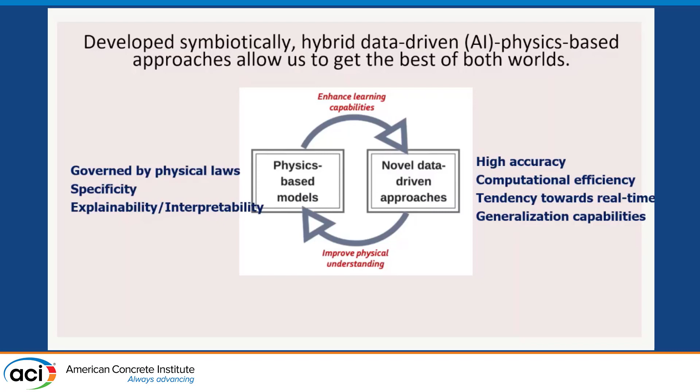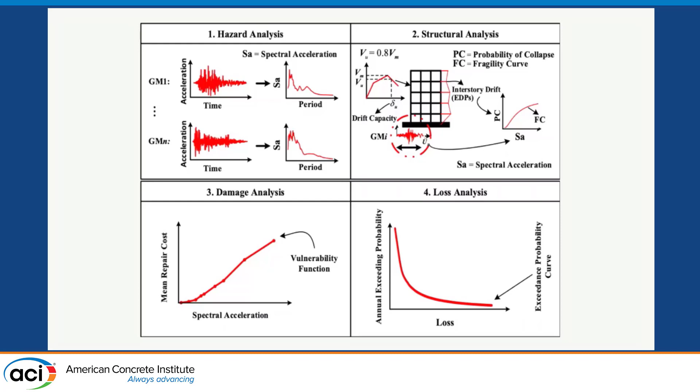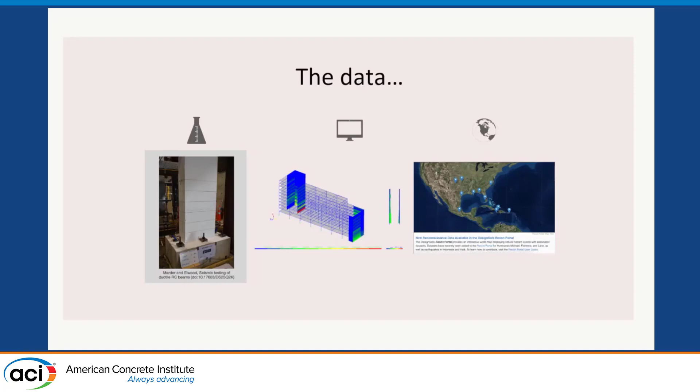So first off, developing large databases. This is all data-driven. Up until the end, everything you're going to see is only data-driven, and then we bring in some physics. So we need some sort of large database to base this in. If you're from the concrete material side, you're going to look at this database, which is experimental data. On the left, we use pseudostatic cyclic loading, like a pseudo-earthquake load in a lab on a reinforced concrete column to build this data set. If you know anything about AI, you're going to look at this data set and say this is not big. But it is.

There are 422 specimens in this data set, and it is because we're just looking at reinforced concrete columns under this specific loading type, right? So we've really narrowed it down to be able to understand what's going on here. And we have a bunch of different splits in terms of rectangular, circular, different failure mechanisms, as well as different load types, and all of that matters for work later on. But essentially, you can see here, we have 422 reinforced concrete columns.

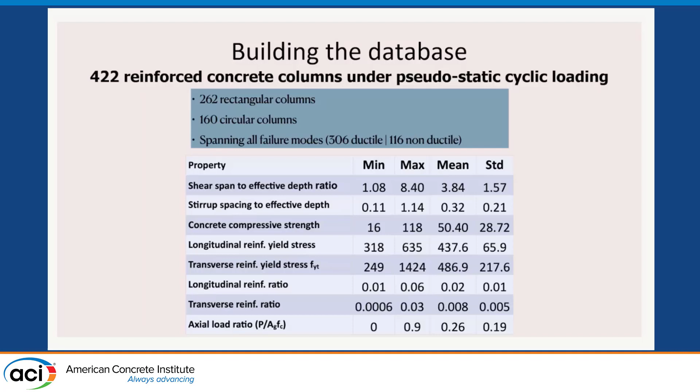Here now, we're going to try and first predict just what's going on at the component level. I'm showing you only for columns, but we do this for columns, beams, joints, all the data sets that are available to us, and you'll see that when we get to the system level. We take all of the different input features and then the dependent features. So we're extracting from the hysteretic behavior, and we actually predict the full hysteretic behavior of these columns, which is just the force deformation relationship, right?

But what's important on the left is that we just have material and design specifications, right? So this is not anything to do with how the load is put on there. We just have axial load ratio as well as your maximum normalized shear stress, and then just the output response factors.

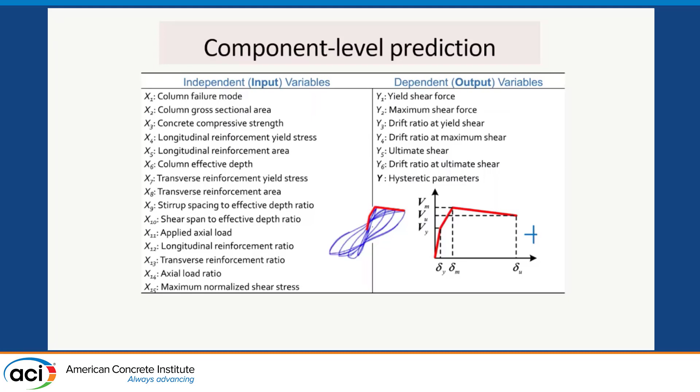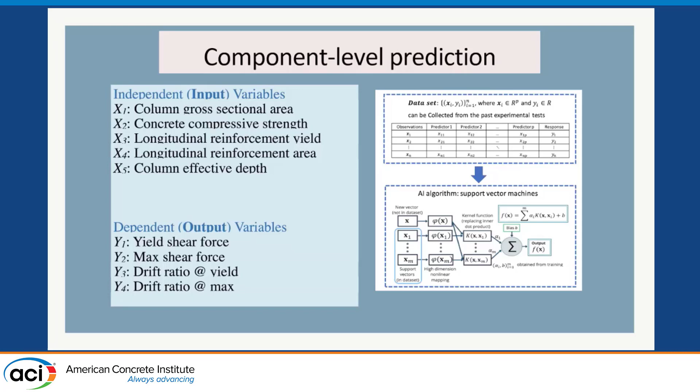From here, we build an AI model that is able to automatically take that input and correlate it with the output. So we train on 80% of our data, and then we can test on the remaining 20% of the data. You'll probably see a lot of different machine learning approaches today. So if you want to know why we chose the type of model that we did, I can talk to you about that later. But in these results right here, I'm going to show you the example of a least square support vector machine for regression.

So you can see after we've trained and validated that model, we tested on that held out 20% set. And you can see on the bottom right is the machine learning model, as well as up at the top, there are 3 different examples, right? And so then you can see on the bottom is your comparison with ACI in the middle, and Sezen and Moehle, which is a common empirical approach, or not entirely empirical, because it's a formula. And then your traditional modeling approaches at the top, so your simulation of that.

And you can see in each case at the top, the bright green is the machine learning model, and it just predicts that backbone curve. So these are 4 different parameters this model is predicting, and then down here you just see one of those values. I believe it's the maximum shear in this case, and you can see how if it fits onto that red line, that's the most accurate you can get, right? So we get really good accuracy with these models. We also get a pretty robust performance, meaning that regardless of the holdout set, we get these same results.

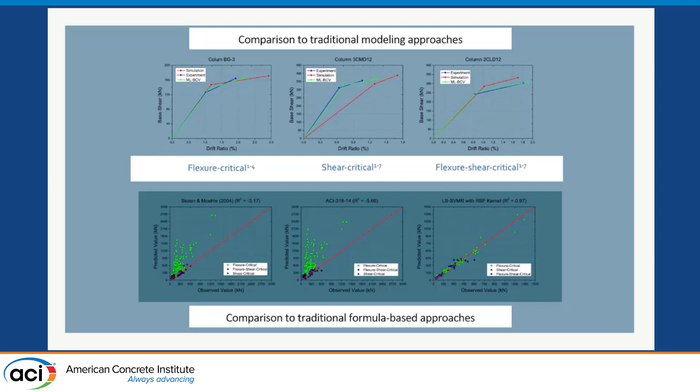And so the only issue is that in ACI, this is intentional, right? Because we want conservative. And so now the next step is, how can we use these to improve upon that conservative nature, as well as give this really accurate result some sort of basis in the concrete industry.

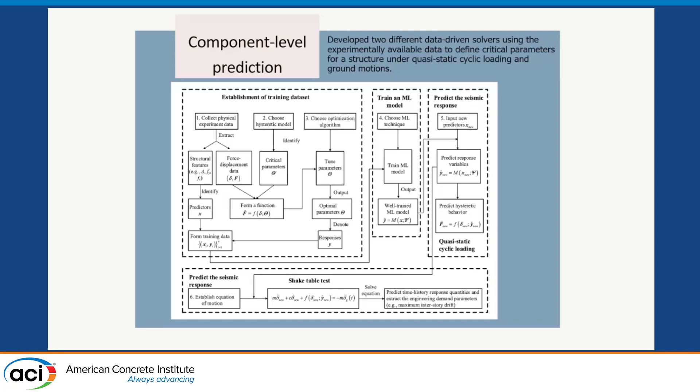From there, we moved on to the component level prediction, but for the hysteretic behavior. In order to get that full hysteretic behavior, that doesn't just come out of a machine learning model, so we had to build 2 different data-driven solvers to get that full time history. And you can see here for the time history, these results are, in my opinion, really beautiful, but you get a really good match between the experiment and the machine learning model on the top in red versus the traditional model, which a lot of times is over-predicting that max value for shear. So again, pretty good results.

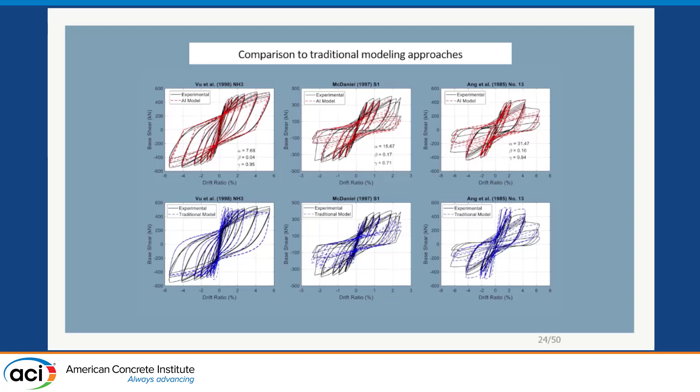What's useful here, I think also, is the computational time. So you go from a simulation type approach where you have, this is in seconds, so 1,000 seconds. I should have had my PhD student write that in minutes because it's confusing to me, or hours, but down to 4 seconds.

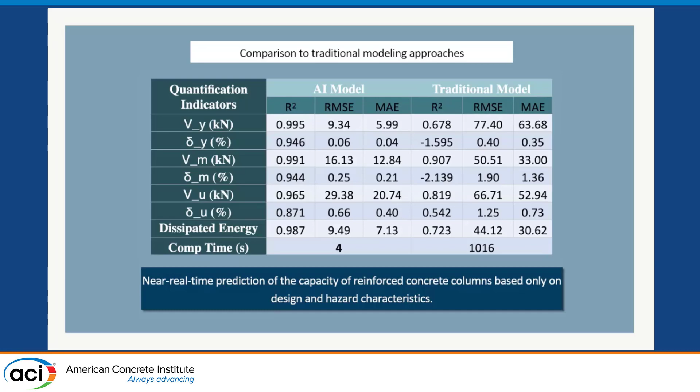So a really great decrease in time that is needed. So this could be really, really useful if we can bring this to the building level for rapid reconnaissance, being able to figure out, okay, we just know design specifications, material specifications of a structure. How do we automatically identify what the performance is, the max, residual drift?

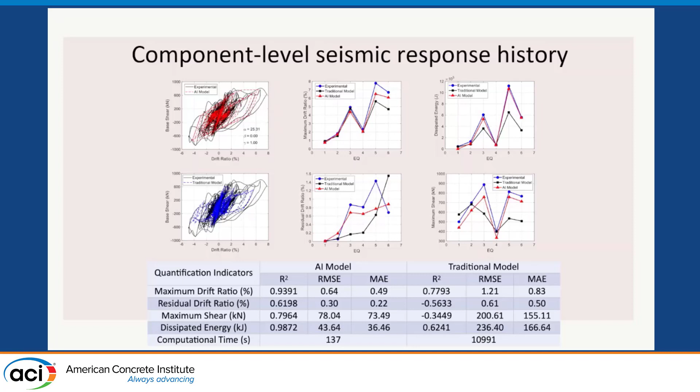And so here is at the component level a couple of those parameters that are used often in earthquake prediction and reconnaissance. And you can see here again the machine learning model, in two different cases, gets each of those pretty well. There is some error here, but we wanted to figure out, okay, what about if we hybridize this? We are going to use a little bit of physics, and we're going to combine this at the system level so that we can get system level prediction for a couple of buildings, or as many buildings as we had access to.

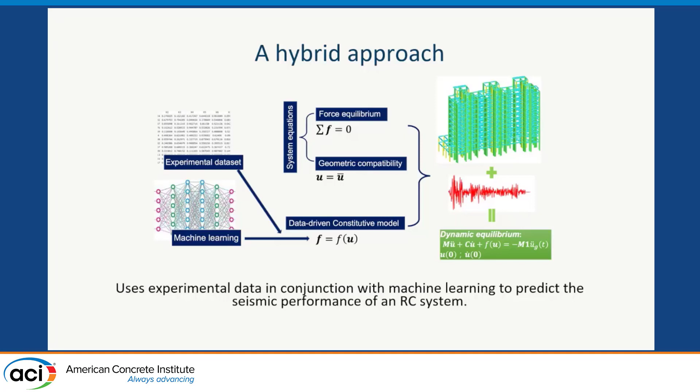So this approach uses your dynamic equilibrium in terms of the physics to constrain this prediction. And then in addition to that, like I said before, we have beams, columns, walls, beam column joints. All of those different data sets are combined together. So we have a model for beam prediction, a model for column prediction, et cetera, and then use all of those machine learning models together to get a prediction on the structural level.

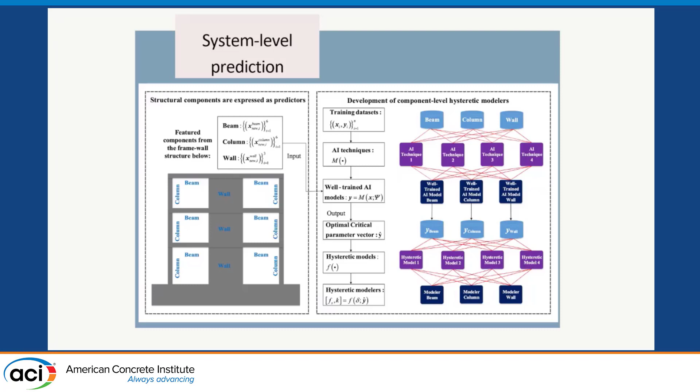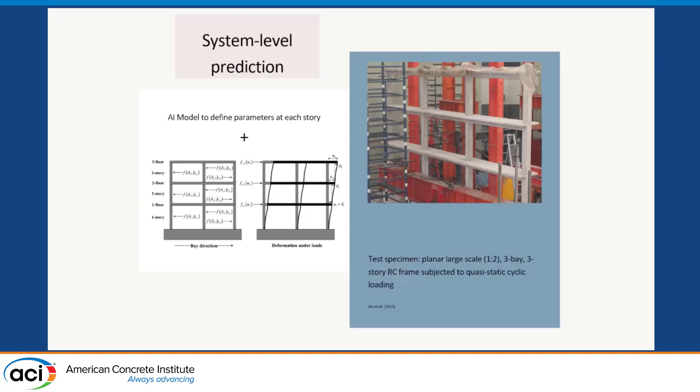So here you see the system level prediction. We have the AI model that defines the parameters at each story. And then here is one of a couple of test specimens that I have results for, but I'll just show one today, of a 3-bay, 3-story reinforced concrete frame, subjected to quasi-static cyclic loading. So still experimental data. We don't have SHM data at this point.

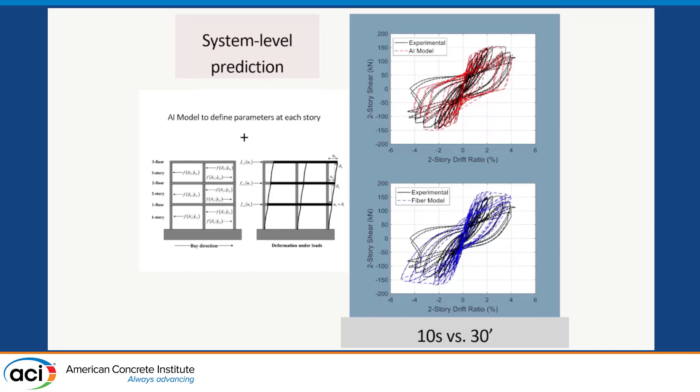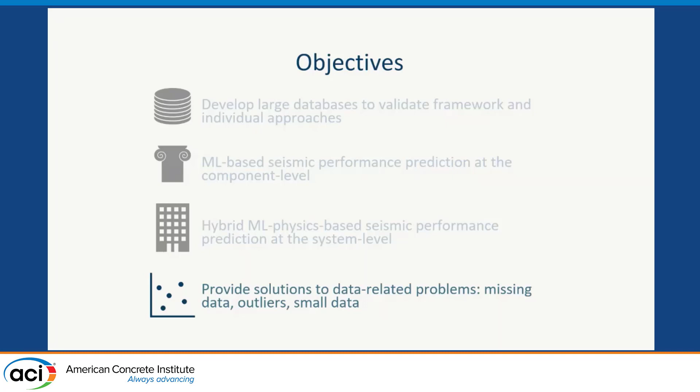And so if you would like to talk to me, I think that we can talk about that. I have a lot of good work in that regard, but I wanted to demonstrate the first base application of this. So you can see here, the motivation was to hybridize these two approaches. In general, I think that's the best path forward. If we can combine physics-based models or physics-based assumptions with these data-driven approaches, I do think we'll get the best of both worlds. You can see down here, we end up with, in this case, some really accurate results.

But I do think that if we continue to work in this way, we'll see advances far, far beyond, especially in terms of, with these approaches, how do we deal with that small data? If we can get so accurate when we have a large amount of data, what can we do when we don't have a lot of data? No approach works for that right now, right?